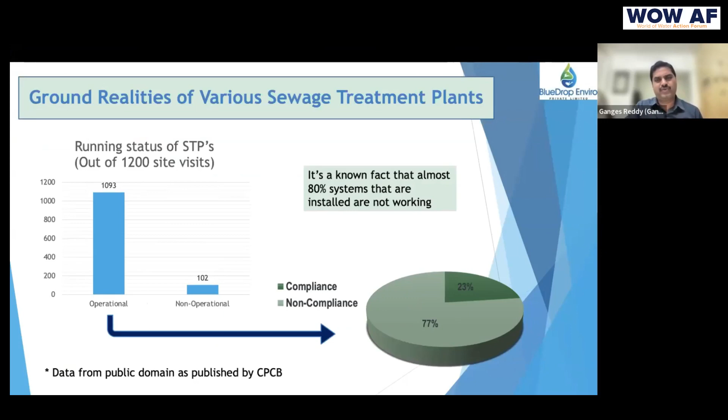This is the ground reality of the sewage treatment plants. As published by CPCB, out of 1,200 plants, nearly 10% are defunct. These are random site visits across the country, and the rest of them, almost 77%, are non-compliant. It's a very known fact that 80% of systems are not delivering results. Just by seeing this, we understand the complexity of these systems.

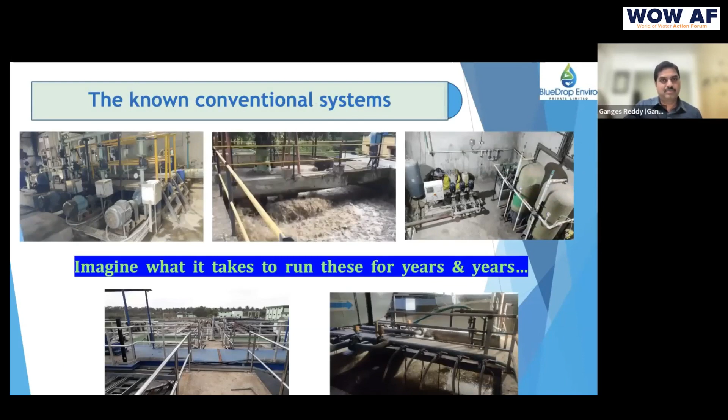And the challenges are quite clear. Very rarely have I seen systems functioning beyond a 10-year period. I have seen systems working for 15 years, 18 years, but those are rare cases.

The high energy bills are one of the biggest reasons in urban areas where apartment residents and villa residents choose to bypass the water because they're unable to bear these bills.

And at the time when the builder builds this, some of the builders have done a very good job, not that they compromised on anything. They brought the best systems and installed them, but they never understood what it takes to run these systems for 20, 30 years. Sludge handling—in many places they install screw presses.

I don't see them working in most places. Odor is a common phenomenon—you don't have to ask anybody where the STP is. Your nose is your GPS; it takes you there.

Noise—there are many high-rise communities today in Hyderabad struggling with these noise issues, where the systems are put in the basements and the noise goes all the way up to the 6th, 7th, 8th, 10th floors. There are some systems that were replaced recently with the Prestige Group in Hyderabad, at least about 3 projects, because of the noise levels.

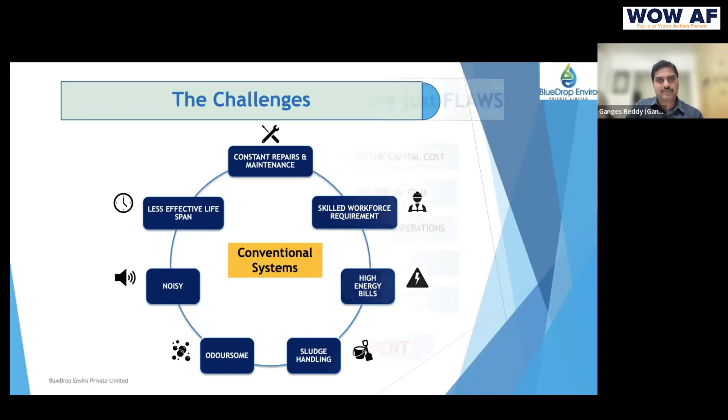But the rest of the things are pretty straightforward. The reasons and challenges I found, from my personal experience, are what I mentioned—understanding the life cycle cost. You invest a crore on an STP thinking the problem is solved, but we actually created a problem there.

A crore of investment—now you have to have 5 to 10 crore rupees to operate it for 10 to 15 years. This is the kind of life cycle cost we are seeing with these systems.

Contractor margin—wherever there's L1 business, they compromise on something, and the result is very high cost on the environment. The number of drives in operating systems is high. There are not many institutes training manpower on how to operate STPs, and this adds to the complexity of the problem.

Most people get trained on the job under a supervisor, so the guy getting trained becomes only as good as the supervisor is. And this is the scenario all over the place.

Revenue models for recycled water are a major challenge today in India. In Telangana, we are struggling with this—the government has announced free water, so very few respect the water.

The alternatives that I'm talking about are these. A few minutes ago we saw that other image—these are the systems that we are building. These are complete replacements of the conventional systems.

They're built in different sizes. This one is built right next to the bedrooms and balconies, hardly 3 meters away. Many people who newly move into these buildings don't even know it's an STP. So this is how these systems are.

So the entire science is hidden from the user. The user only sees just this. This is what the operator has to deal with—just housekeeping of these plants, probably adding some bacteria, and nothing more than that. The science, the entire design and engineering, is done here, so this is implemented in this fashion.

These systems run for 30 years, with all the bells and whistles for how you maintain the system in the event of any clogging scenario, if something goes wrong. We provide all kinds of access points where the system can be very easily maintained with low-skilled, under-skilled people.

These systems are capable of handling very high loads. BOD can go up to 1,000, 2,000, whatever is required, though the footprint changes. We have proposed these systems to treat waste where nitrogen levels are 1,000 or more, and BOD levels are 1,500 or above. Sewage is less of a problem for these systems.

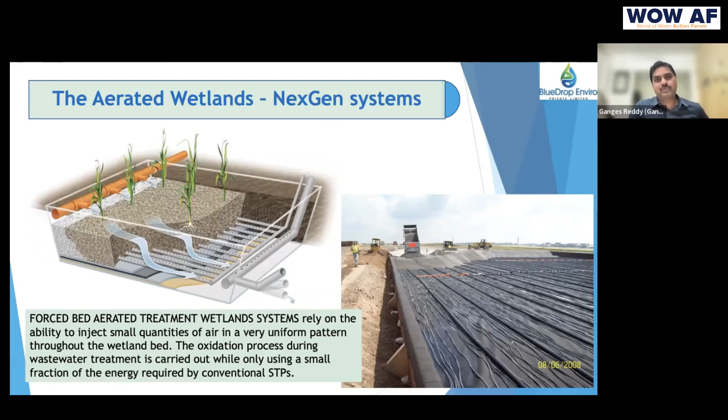A lot of mining projects are handled in the US and other places. Mining wastewaters were handled through this technology. It's well known that this is what I'm referring to.

Passive wetlands used to take a lot of space. Then we started to dose certain bacteria ahead of time into the holding tank, where biological activity starts happening faster. We were able to reduce the land footprint to 2.5 square meters, which still wasn't enough reduction for urban areas. So we went into aerated wetlands.

We brought the size down to 1 square meter per KL today. So we build the least footprint wetlands in India as of today, and we are further augmenting the passive holding tank that we have in this system.

The water comes into this holding tank. It's pumped, or it comes by gravity. This is a passive system - we don't do anything here except add certain bacteria.

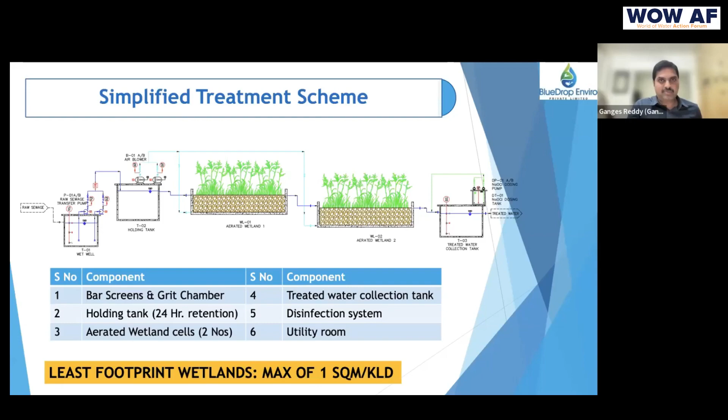Now we are trying to do something within this holding tank to further reduce the footprint of the wetlands, where footprint is a challenge. If land is available, I would like to minimize the energy and minimize anything else and have as big a wetland as possible, because these are more robust and more sustainable.

So this is treated water coming out of a 150 KLD treatment plant installed for Deccan Cements.

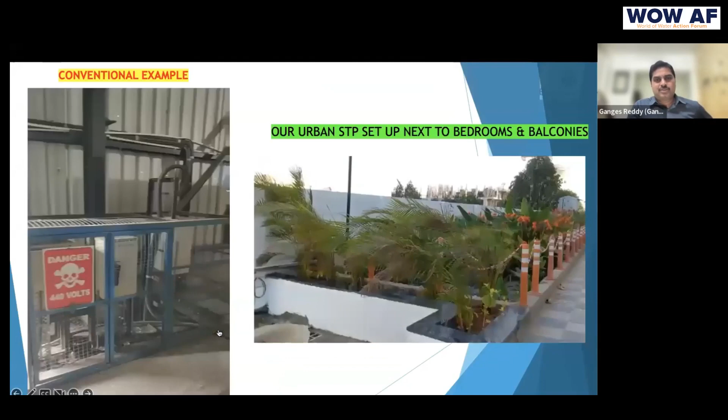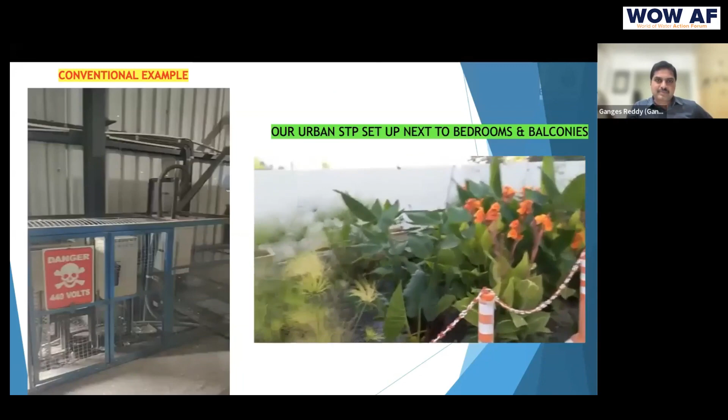Just to give a visual presentation of how a system looks, what we built - all these pipes are coming from the bottom, and there are access points to reach the bottom if something were to go wrong.

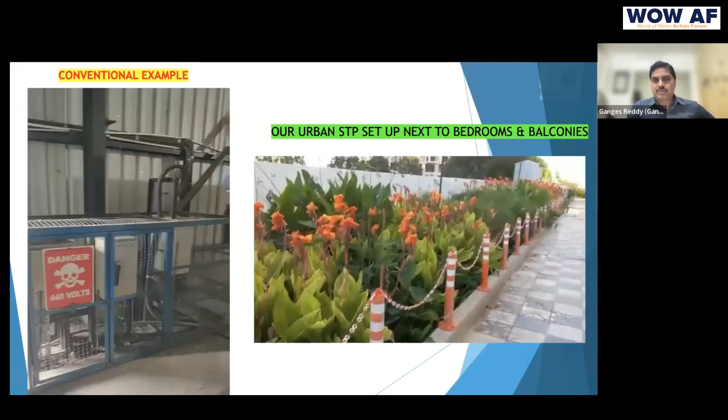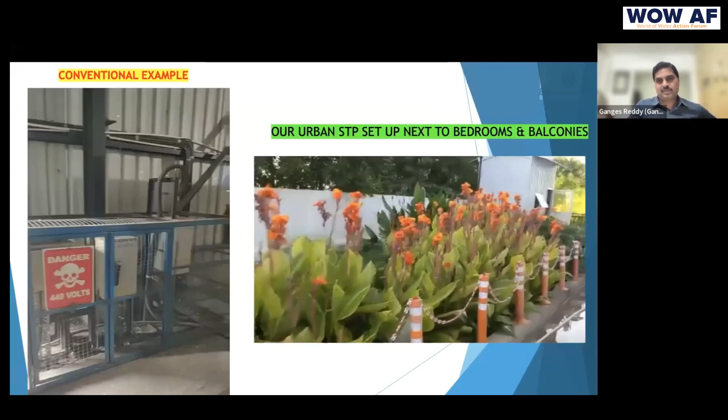This is built in a 3.5 meter setback that was given to us out of their 6 meter setback. There's a holding tank built prior underground. From there, the water gets pumped in a single stage into this wetland. There are 2 wetlands in this one.

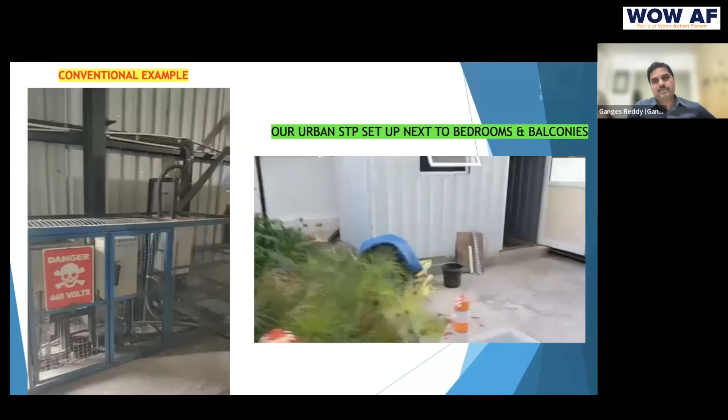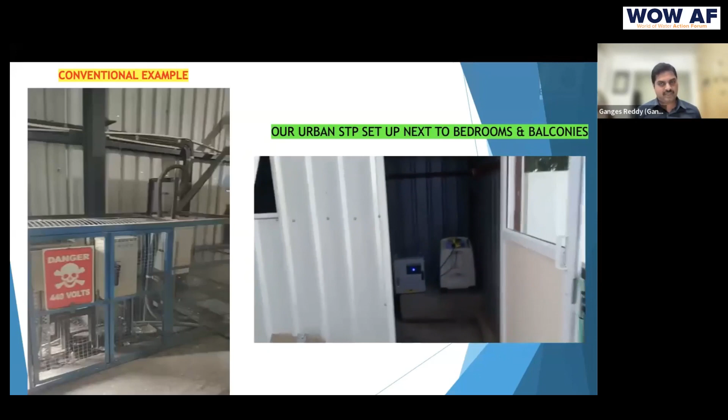The entire water is subsurface - you don't see water outside. Anytime you expose water, like in SBR or MBBR systems, anytime it's exposed to ambient air and wind blows over it, you would certainly know where the STP is, because it carries the odor with it. Here, subsurface wetlands do not provide that kind of challenge.

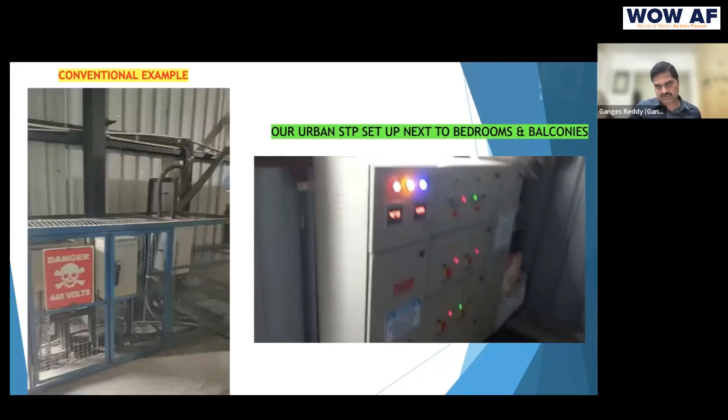This is all the machinery that we have - a very tiny blower that runs for 8 hours, controlled by this timer-run control panel. We have also set up a small ozonator for disinfection, to take the water for dual plumbing purposes, like flushing.

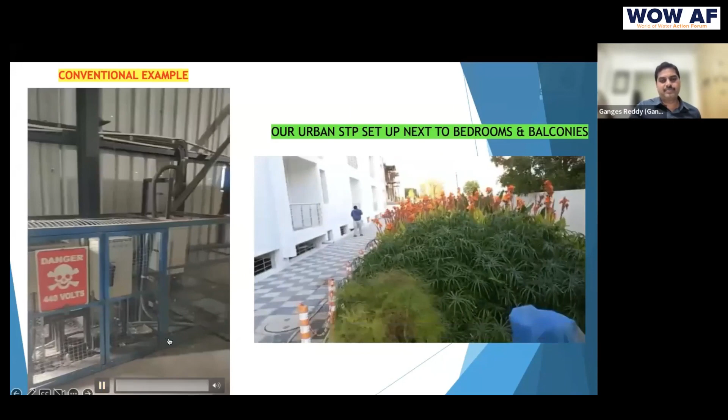So that's all for the STPs. And now a conventional STP - this is a typical conventional STP.

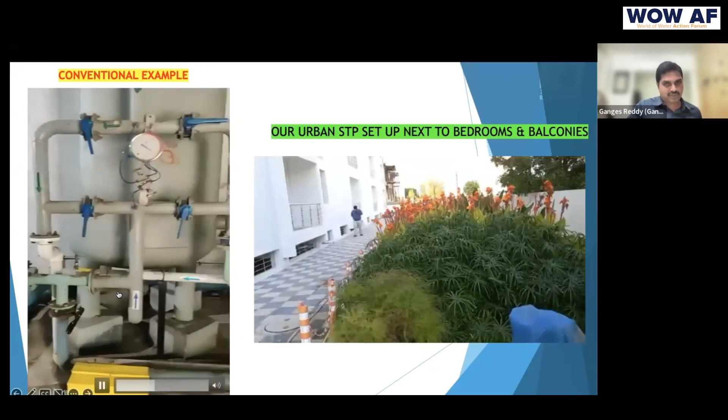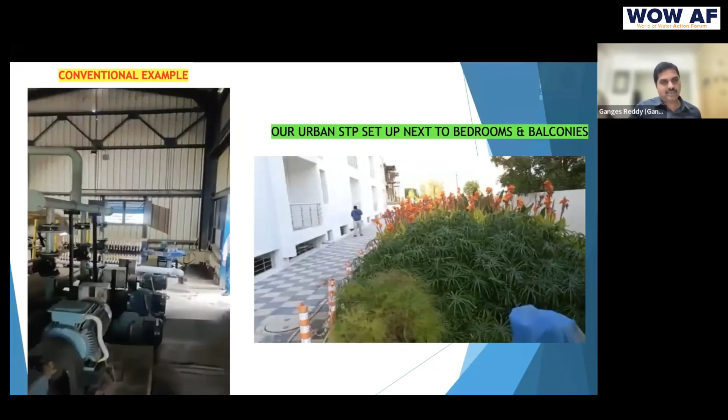Not all conventional STPs look the same. There can be much cleaner, simpler ones, but on average you find a good number of pumps, blowers, and motors. The one ahead that you're seeing is a screw press, which, as I mentioned, rarely works - in this case also, it's not functional.

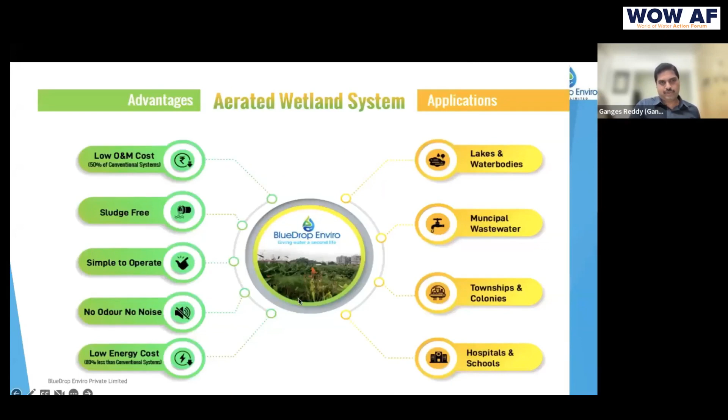This science can be applied for many applications - some of them are listed here. These are reasonably sludge-free, simple to operate, with no odor and no noise. You can design them to fit your landscaping needs, integrate them with your campuses, and if you have a very small footprint, you can go with a G+1 or G+2 model.

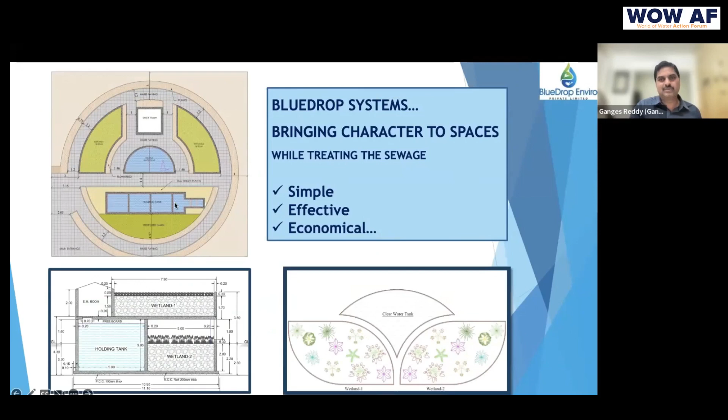Once the engineering is figured out, the science can be taken to the next level in any fashion. These kinds of systems bring character to the spaces - we build them in the same fashion. A lot of visitors are actually surprised to see that these are treatment systems.

These are some of the projects that we built. There are about 70 projects overall that we have done, and we are building another 40 projects in the next 1.5 years. When I talked about life cycle cost, this is what we are talking about.

A conventional system, costing this much with energy and manpower, comes to 56 lakhs overall. Here we're talking about 24 versus 7, 20 versus 5, 8 versus 2. There is some cost here for the enzymes and bacteria we use, but otherwise, in this scenario of 24 lakhs, there is zero money available for anybody - not the contractor, not the client. It's direct money that is paid to the government.

The contractor can make a little money here - if there are fewer repairs, he can make a little more. In this one, there isn't much money. So on a 56 lakh burn, nobody is making any money here. So what is the incentive for these fellows to really keep up with the quality that is required?

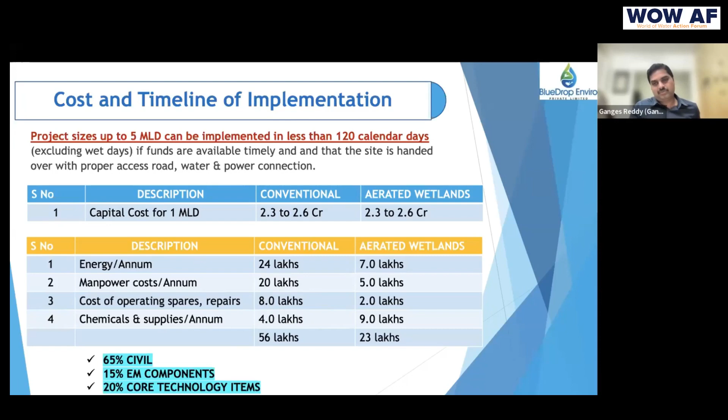So the business models have to be revisited in terms of building these systems. Life cycle cost, when you take it over a 15-year life cycle, assumes the system works meticulously for 15 years, which is not the case with most systems.

You're talking about 15.53 crores for a mere 2.5 crore capital investment in a conventional system, versus 7.9 crores in our system. For a small 100 KLD community, you're talking about energy cost of about 45,000 to 47,000, plus manpower cost. Over 15 years, a 45 lakh, 100 KLD sewage system would cost about 3.2 crores.

This is where small communities - 100 families, 200 families, apartments - are really struggling today to meet this kind of monthly bill, which was never told to them. They're simply not aware of it.

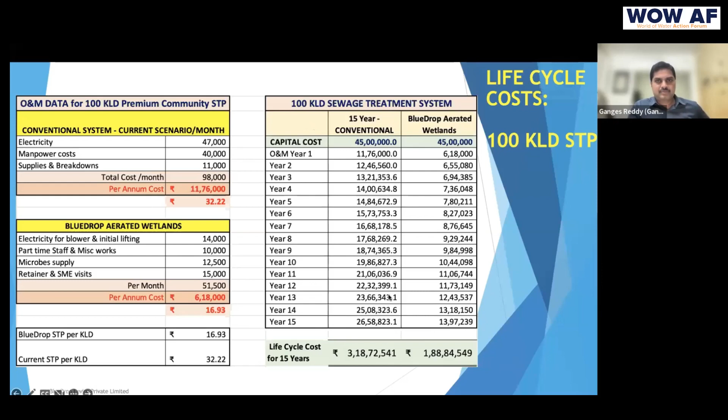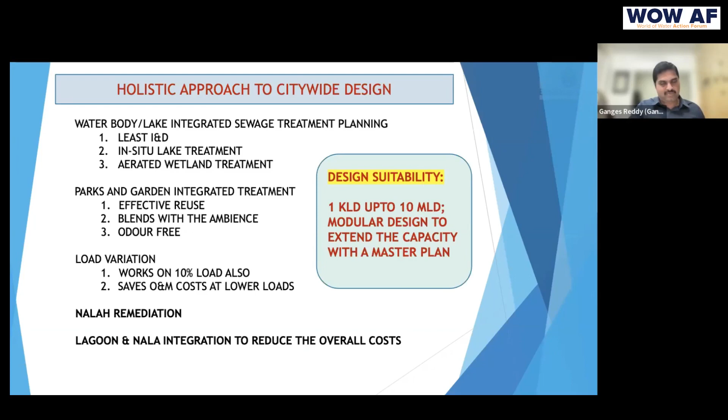We can do a pretty holistic approach for a citywide design, which is what we can have as part of the discussion today on how we can integrate things with lakes, nalas, and the STPs. There's a huge advantage India has today which, to my knowledge, the government is not leveraging, or probably the right people aren't taking things into their hands yet because of limitations. But we will cover this part in a detailed discussion.

It significantly contributes to the SDGs, about 5 SDGs, but primarily I picked climate action. We're talking about 80% less power, so you're talking about reduced carbon emissions, which otherwise are significantly high.

I'm sure most of us here are aware that sewage treatment plants and effluent treatment plants contribute as the sixth largest factor to GHG emissions. The amount of methane released through anaerobic digestion, and the energy deployed on treatment systems, is humongous.

In a wetland system, they act as carbon sinks and provide carbon sequestration. They bring biodiversity into the game, and finally they serve ecosystem restoration services.

So when you go about environment sustainability and social governance goals, a lot of players are now looking at how do we reduce our energy consumption, and how do we bring the rest of the things into conservation. These wetland systems can provide a great opportunity for us to redefine the wastewater treatment space. Not saying this is the only technology, there are a good number of technologies that can be deployed, but we have been practicing this and we are seeing significant results, and people are benefiting from it.

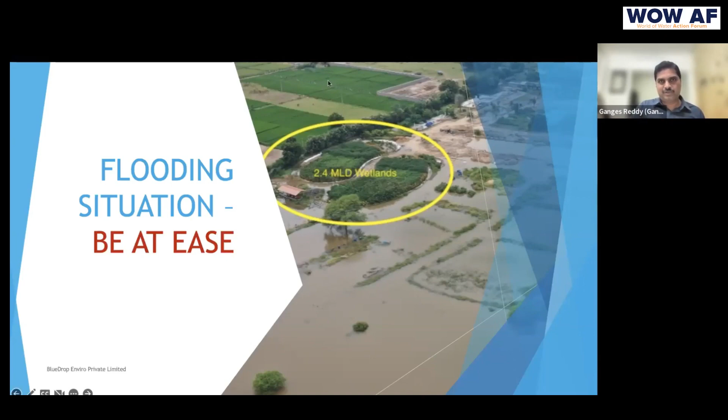So these are some of the things I wanted to share today. This part is the work that we do - this is the background I come from. I don't know a lot of you here, you must be much more experienced and may already know a lot of things. Yes, so that's my little work.